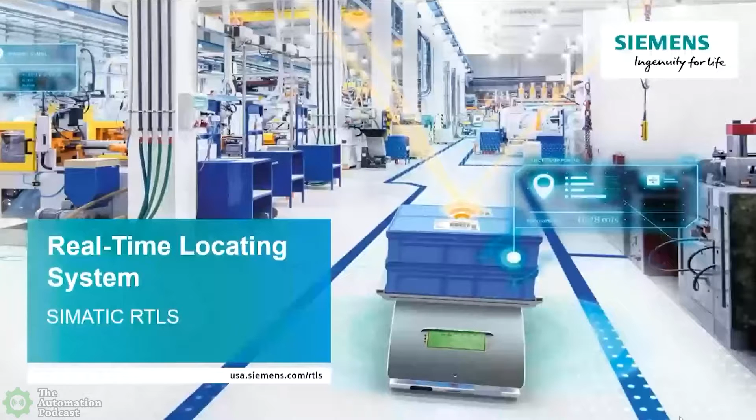Nicole, thank you very much for putting this presentation together and coming on the podcast. I'm really looking forward to learning all about the real-time locating systems that you guys offer from Siemens. Yeah, thanks, Shawn. I'm happy to present here today.

We're talking about real-time locating system, SIMATIC RTLS, which is the Siemens RTLS portfolio. And I'm going to give a quick introduction about what RTLS is, how it works, and definitely some use case examples so that everybody can understand where RTLS can be used, because there's a huge variety of different applications and use cases that customers can benefit from.

And I'd like to explain real quick the difference between RTLS and RFID, because I think RFID is probably more known than RTLS. And the way I like to describe it is that with RFID, you identify something, you know what it is, and you know when it passes a certain read point. But after that, you lose it until the object or the asset, whatever you track, goes to the next read point where you track it again.

So with RTLS, what we do is we locate in real time all the time, and it's not necessarily that one technology is better than the other, or there are applications where RFID can be used together with RTLS, because both of the technologies can complement each other very well. But sometimes it's also very clear that depending on what the customer is looking for, what the application is like, it could go both directions. And a good thing with Siemens is that we can consult the customer on the right technology, because we do have both in our portfolio.

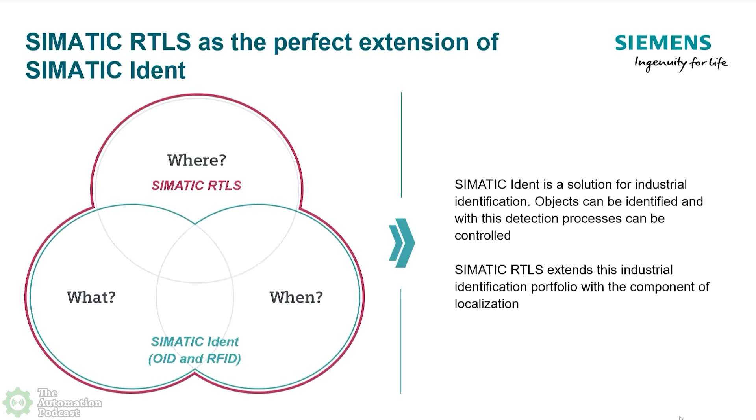So coming back to RTLS and how it works. So just like with RFID, if you want to track something, you got to put a tag on it, a transponder. And these transponders, they communicate with the infrastructure that you see here in the middle layer. These are our so-called gateways. And what we provide from the tags is the location data, X, Y, and Z. We provide a unique identification number. We provide a timestamp and a battery status, because we're talking about an active technology here. So our tags typically have either a battery inside, or they have some sort of power supply. It can also be an external power supply. I'm going to talk a little bit more about the different transponders on a later slide.

But these gateways, they bring the data that we get from the tags into our locating manager, which is our software that calculates the real-time position. And then from there, it really depends on what the customer wants to do with the data, where they want to use the data. And we can integrate into, whether it be an ERP system, MES system, it could be a PLC. We have software within Siemens, middleware, where you can see the data, analyze the data, run your reports. So everything is possible. It just depends on what the application is like and what the customer requirements are.

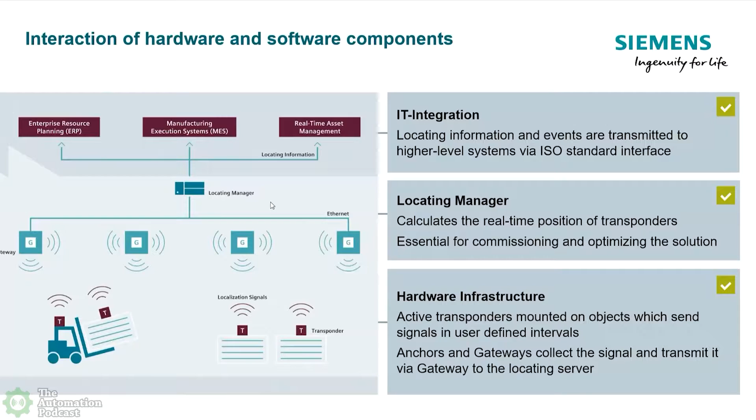This is an overview of the portfolio, what belongs to an RTLS system. So as I mentioned, we have the tags, our transponders. You see there's a variety of different ones, depending on the way you can mount the tags on the system. You have a variety of display tags here, where we can actually save information on the tags. And then, as I mentioned, there are different tags that have a battery inside that are rechargeable. The asset tag here in the front, that's our smallest tag. That one you can change the battery. And then we have a tag that typically goes on forklifts or any kind of vehicles that can be connected to an external power supply.

In the middle, you have the gateways, as I mentioned, our infrastructure, and on the right, the locating manager, which is our software to configure the system. You see the objects moving around here in our visualization. So it's basically our configuration tool.

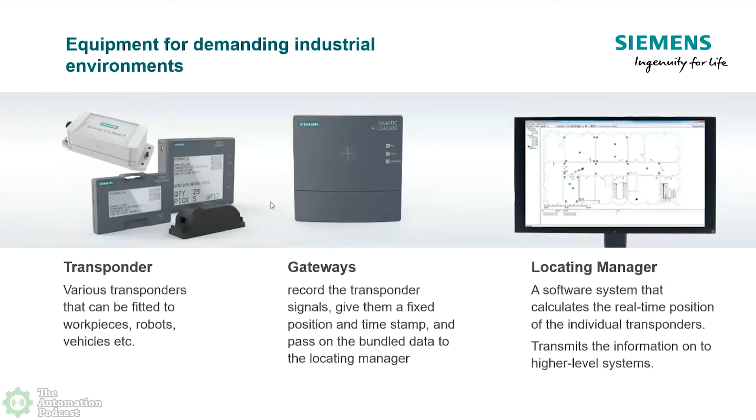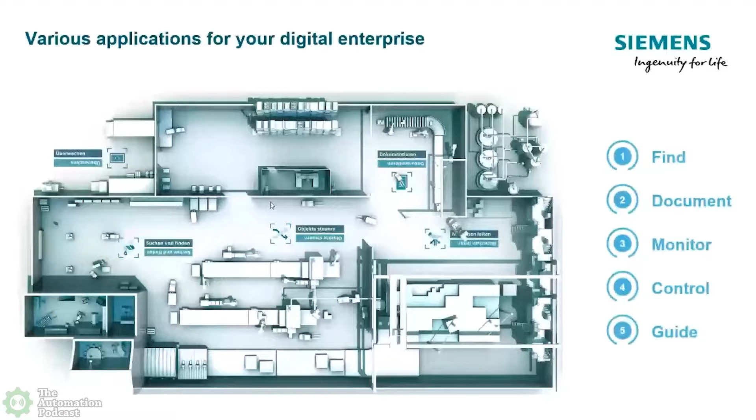And what RTLS can really help our customers with is to find things. It's always interesting when I talk to customers, how much time they really spend on searching for things. Very time consuming and long search procedures. They lose their assets, where at the end they have to spend time either producing more or buying more. So it can really help them to find and keep track of their inventory, and then document everything automatically. So obviously there's still a lot of paper travelers out there.

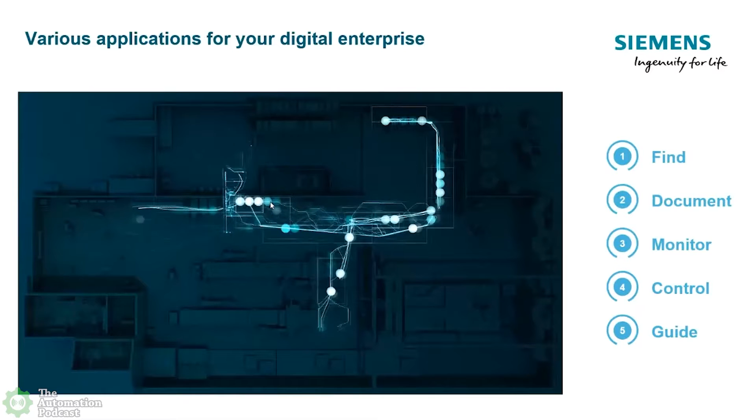It can definitely help reduce that, monitor things, get an overview of your logistics procedures, your manufacturing processes, and also control and guide, whether it be people, whether it be AGVs or forklifts, as you can see here on the screen. So a huge variety of different applications that you can do with RTLS. And these are the different application areas.

So we have a lot of applications in smart manufacturing, production control, for instance, or production applications, logistics applications, warehouse, people tracking for safety, for instance, but also to locate service and maintenance personnel or provide certain access to people. And then vehicle tracking, fleet management, whether it be your own fleet or trucks that come in, and also yard management like bus depots or light rail.

And we're going to go a little bit deeper into those kinds of applications just to show you what you can do, show you different applications that we've done to give you a better idea, and maybe also to identify something where you can use RTLS in your production facility or your logistics facility.

So one of the common use cases is production control, work in progress. What we did here was the customer used to work with paper travelers, meaning that they had paper travelers on their car bodies. So the car bodies would come into a certain station and workers would have to check what needs to be done, what's the next production process.

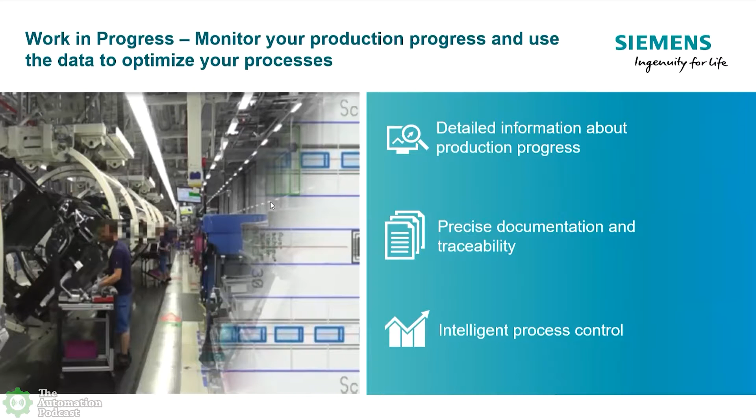So right now, what they do with RTLS is they put a tag on each of the car bodies and they know exactly where each car body is in the production process. They get detailed information, everything is documented automatically. They can trace it back if they need to, and they were able to optimize their whole production process.

Along with that goes this application. What we did here was we put a tag in those tools that this customer uses. So for instance, in a screwdriver, we put one of our OEM tags in there, and they get precise location of this tool. So you could see the path of the tool. We're able to locate outside of the car body, inside of the car body, and track the tool.

And what we do here is we put geofence areas around the car body. So once the car comes into a workstation, because there is a tag on the car body now, the system knows exactly what kind of car it is, what needs to be done. Even the torque is automatically set already.

And once the worker steps into that geofencing area, the screwdriver starts working, they can do their production steps. And then once they step out of the geofencing area, the screwdriver stops working. So it's also a safety procedure here that we do with RTLS. And we save significant time here for the customers, and they're actually able to produce 4 more cars a day, which is obviously a huge benefit.

I think you were also telling me that you had a case where you could even tell if they did all, like let's say they had to do 10 steps, like put 10 screws in. You could actually alarm or warn based on, hey, you didn't do all 10. You only did like 7, 8, or 9 of them. Is that correct? That's correct, yes,

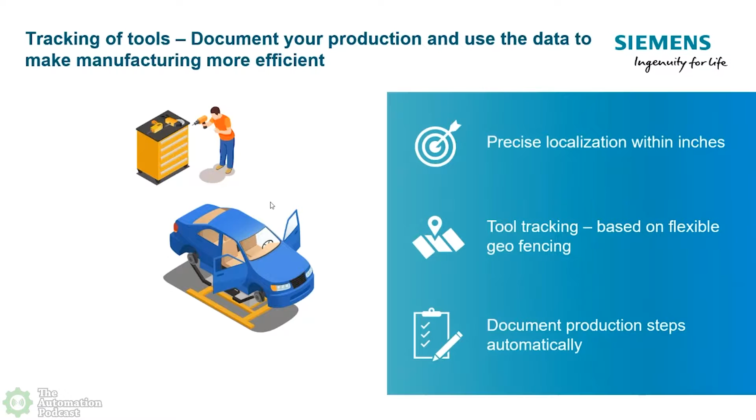There's another application, which is basically a smart glove, as we call it. So that glove has our tag in it too, and it's very similar to what you just said. They know exactly which production steps need to be done. And then based on the location where the worker was, or in that case, the hand or the glove or the screwdriver, the system detects if every production step was done or if something is missing, and then it would set an alarm and the worker knows, okay, I missed something, there's something I still need to do. So it's also quality protection at the end.

And then based on the location of the tags, the information will change and provide, like I said, different information to a worker.

An example here is one of our customers. They produce plastic parts, and the plastic parts needed to be used in a certain time. So they produced the plastic part, they put it into a storage area, and they basically didn't know. They didn't have any overview of when it went in there, how long it's been sitting there, etc. So they now use one of our e-paper tags, and they set up a storage area with a geofence, and they know exactly when a box with the plastic parts goes into that storage area.

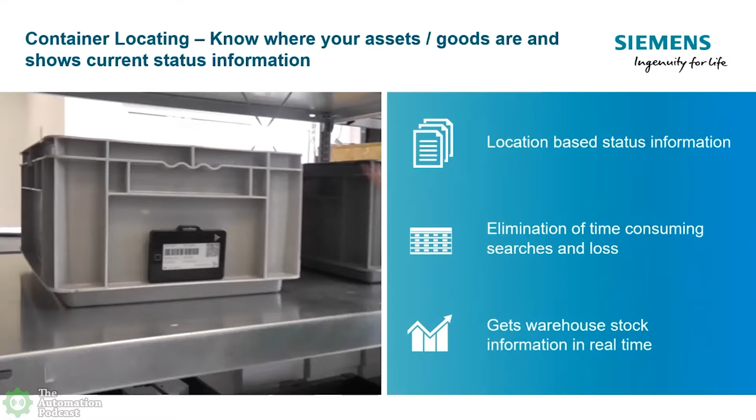Wow, that's nice. And just for anybody who's listening and not watching, the Paperwhite display looks really good. They got a barcode on it, they got a DMC on it, which is like a QR code, and even from a distance, it looks really like a Paperwhite Amazon Kindle. It's just an impressive looking display. Yeah, and this is really up to the customer. Like I mentioned, we have a designer software here, and they can determine what they want to see on the tag.

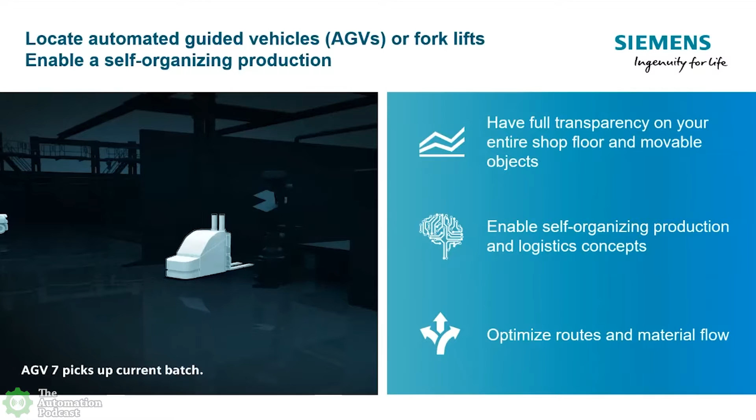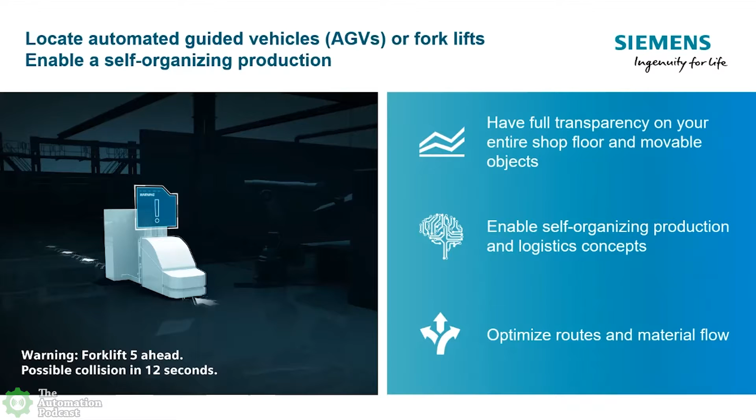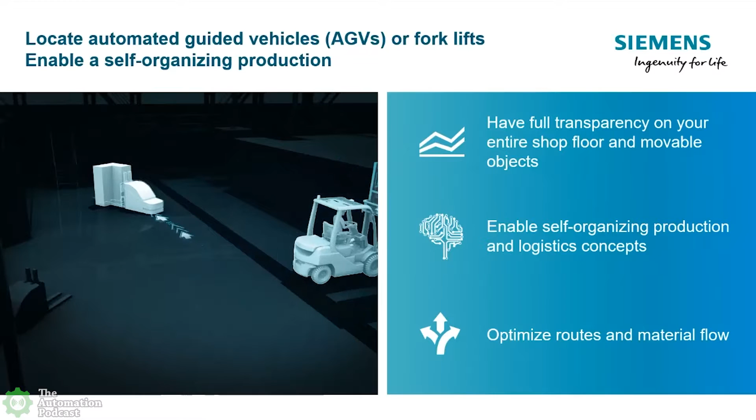Another example is AGV locating or forklift locating. There are requests for collision avoidance, of course, when you have high traffic areas and you have people, you have forklifts, you have AGVs. So all that needs to be coordinated in order to avoid accidents, and with the location data, we can provide that information and say, okay, there's a forklift, there's an AGV, they come too close together, we can set an alarm. The system can alarm a person or can stop an AGV, for instance. But you can also optimize your routes and optimize your material flow.

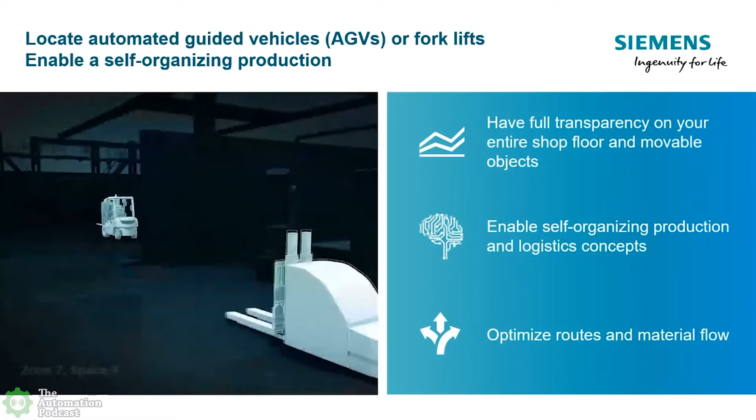Inbound and outbound logistics. One of the things I would like to mention is that our system can be used indoors and outdoors. We have two different technologies in our system. We have ultra wideband, as I mentioned, and we also have 2.4 gigahertz technology. So it's a hybrid system, can be used indoors and outdoors. Gives a huge scalability and flexibility to our customers.

So this example here, whether it be your own fleet or you have external trucks that come in, you can just equip those with a tag, or once the trucks come in, you provide a tag to the driver, and you know exactly where and how long those trucks are in your facility or in your yard. You can guide them to an available dock, for instance. One of the things we can do as well with RTLS is, I was telling you about how it works, we work with triangulation typically in order to get the exact location.

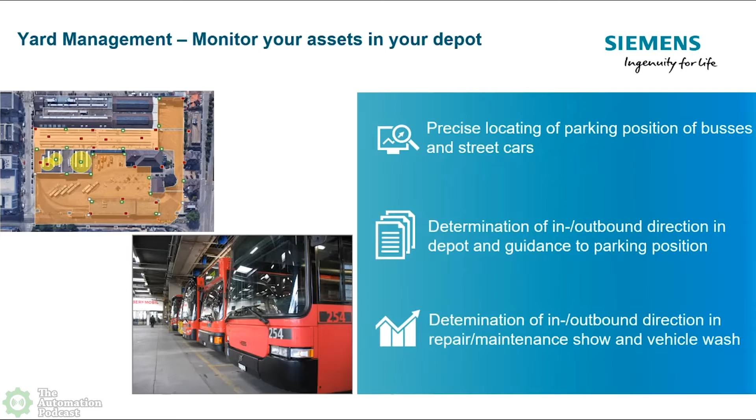And as you can see here, this is typically what a device plan looks like. So you have our gateways, which are the green and the red dots. And we provide that for the customer so they know exactly how many devices they would need in order to solve their application, to get the location information they need. And these yellow circles that you see here, that's basically where we use presence mode, just to give you an idea of how we lay it out for a customer prior to them purchasing it, so they have a good idea of what the system will look like and how many devices are needed.

Yeah, and then Sean, to your other example with location of people, definitely, visitors, if you want to know, are they still in the group or did they just wander off? There were cases where customers came to us and said, hey, we have accidents when visitors come in, so we need a way to locate them. If they go into an area that they're not supposed to go into, or just a dangerous area, we need to be able to alert them, or basically keep an eye on them, or even later on, go back and see where visitors were. So that's something we can do with RTLS.

But also, when you think about service and maintenance personnel, if a machine is down and you want to know who's the closest person that can actually repair the machine, you don't want to waste a lot of time, definitely not when a machine is down. So we can locate service and maintenance personnel with RTLS, and that way you can send the person that's the closest, in order to reduce the machine downtime.

That's one of the requests I've had over the last 30 years. These facilities are huge, whether it's a big outdoor facility, a treatment facility, or a big indoor facility. They typically are running a staff that's right sized. And so, if somebody's in building 12, they want to direct them to building 11 rather than have somebody come all the way from the front office. So yeah, if you have a staff of technicians, knowing where they are and what they're working on, that's huge. Definitely, yeah. Or if you have areas with just a dangerous environment, right?

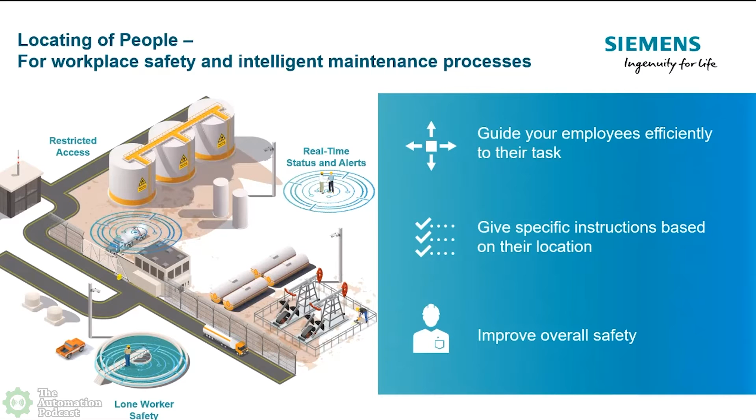And I guess we all know the challenges, but just to emphasize it here, the most important question nowadays is, how do I keep my employees safe, right? How do I help navigate those new guidelines? How do I also provide some confidence to the workers, that they either come back to work or that they feel confident in their work environment?

And then, of course, the additional costs that customers face, not only because of the shutdowns and the lost production, but also the cleaning and disinfection procedures that they have to go through, especially when they have people in the plant that tested positive.

And then, of course, you have production facilities that had to completely shut down, so they're trying to find a way back. And you also had the essential workers that needed to keep producing, but sometimes they went down from, let's say, 3 shifts to 1 shift, so they're trying to ramp up production again, but still trying to keep their employees safe.

And then the investments that they make, they obviously want to make it a future investment and invest in something that they can reuse. Nobody knows how long we have to maintain social distancing, but it's good to invest in a technology that you can also use for something else. So all of those challenges and requests that we received from customers led us to come up with a solution based on RTLS, which I'm going to introduce now.

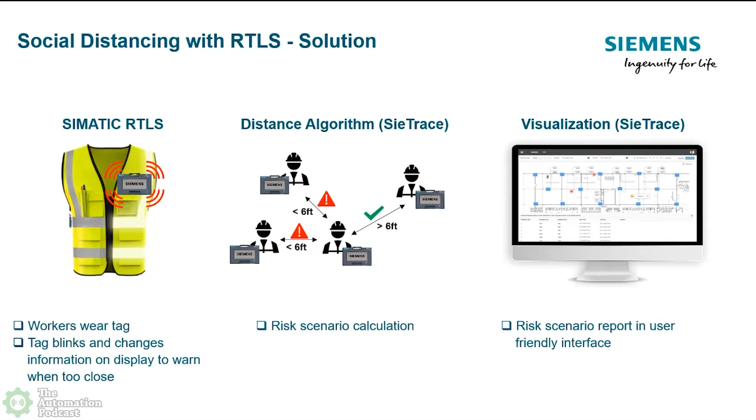You can run reports and really analyze the data of the violations. Yeah, that's amazing. So if somebody did get sick and you want to see if they were congregating with other people, you could run it backwards and you could see who they were. If they did congregate with any other groups, you could see who they grouped with. That's excellent. Exactly. I mean, the contact tracing is key, right? Especially when somebody gets sick.

And we know it from our own Siemens facilities where we actually implemented the solution, because I know that if somebody tested positive, they had to go through very time-consuming interview procedures, and they, of course, had to ask the person who the person was in contact with. And honestly, I don't even know what I had for breakfast this morning, so I wouldn't know who I was in contact with, or probably not everybody, right? And then these people, who were they in contact with? So it's a long procedure in order to find out who could be affected as well.

And we provide this solution here to really help to overcome those challenges and provide this data quickly. And that's something that you need, right? Alarming people is one thing, and that's important. And a lot of different solutions can do that, but this here specifically shows all the features and all the benefits that we can provide, because not only is it the contact tracing and the alarming, if you know where violations happen, you can actually do something about it, because there might be hotspots, as we call it, where those violations happen on a frequent basis.

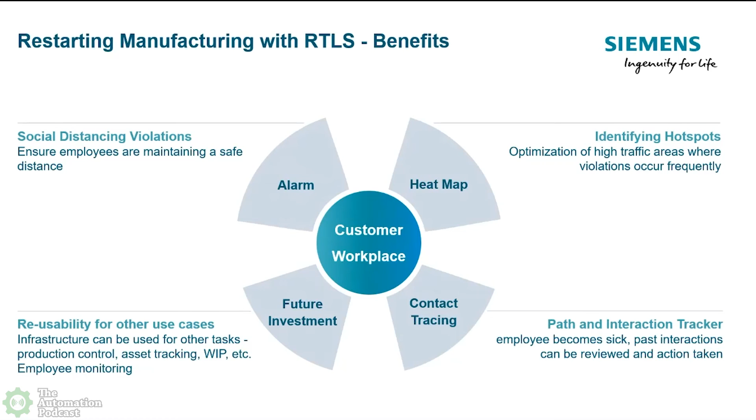Or, like I mentioned, if there is going to be a second wave, you can just reuse it again and give it back to the workers. Or you can just use it at the same time as social distancing. So there's really no limitation, and the system provides great flexibility for customers, and it's not something that they have to throw away after we're done with social distancing, which I think is a key point here.

So yeah, that's basically the overview of our RTLS system and what can be done with it. And I hope I provided some ideas and a better insight and understanding of what RTLS can do. And obviously, we're here to support, right? There is a whole team that helps to find the right solution, consult on the design of the system, provide training, and of course deploy the solution as best as we can, and provide exactly what the customer needs. And if you do have a need, then just reach out to your Siemens contact.

Nicole, thank you so much for putting this together. It's so interesting. It's such a great technology. It's something I've had people ask me for years, and I'm like, I don't know if anybody can do this. So this real-time location systems is just very, very interesting stuff, and I hope our listeners find it interesting as well. But thank you again for putting it on and coming on the show. Absolutely. Thank you very much.

I really enjoyed that presentation. Just so much going on there, so much you can use that system for. And I really want to thank Nicole for taking the time out of her busy schedule to put that together for us and come on the show.